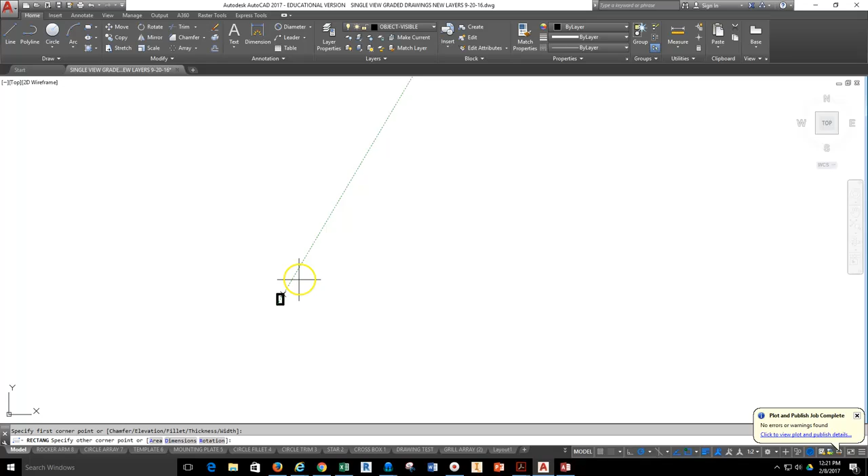In order to show how the rectangular array will function for us in AutoCAD, I'm going to grab a rectangle and draw one with dimensions of 1 inch by 1 inch, so this is a 1 inch by 1 inch square.

I want to make a series of these that line up in columns and rows, and I want to make 100 of these across my screen. To start the array, I'll pull down the array tool and select rectangular array.

My command line now says select objects. So this rectangle is the object I'm going to work with, so I select it, and then I go ahead and hit enter.

Now the array tool gives me several options, and the ribbon bar changes into the array dialog box where I can see columns, the distance between, total numbers, rows, distance between, total distance, and I can also look at the array itself, which has several grip points and places to see the distance between.

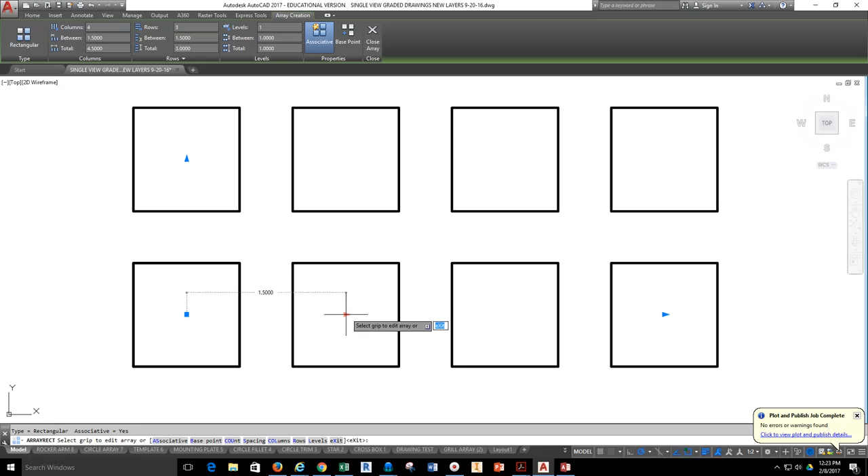If I sit over top of this particular arrow for a second, I get the distance between center point to center point. If I come to the arrow at the far end of the array, this is telling me how many columns I have.

If I select this and pull, I can now add columns, and if I sit over the arrow again it tells me how many columns I have. I can do this with rows and columns, and also adjust the distance between the same way. That same information can be adjusted on the ribbon bar.

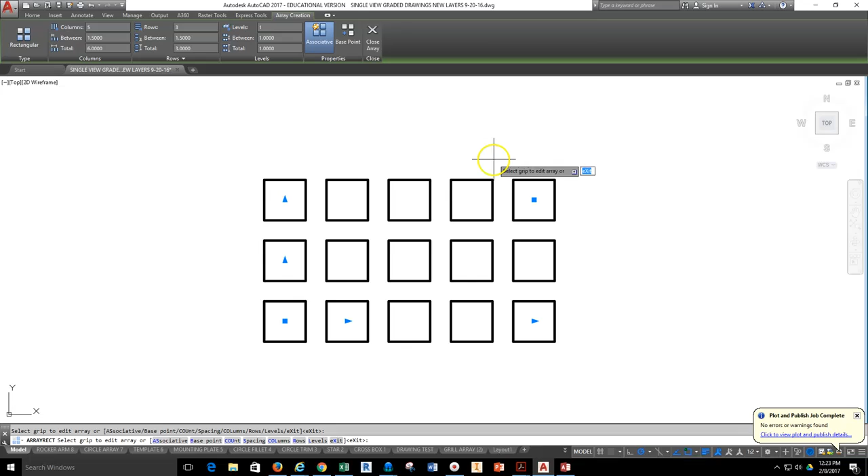If I wanted to take those 7 columns and make them 5, I hit enter, and now it takes me down to 5 columns. Same way with rows - if I want 5 rows, hit enter, and it now creates 5 rows.

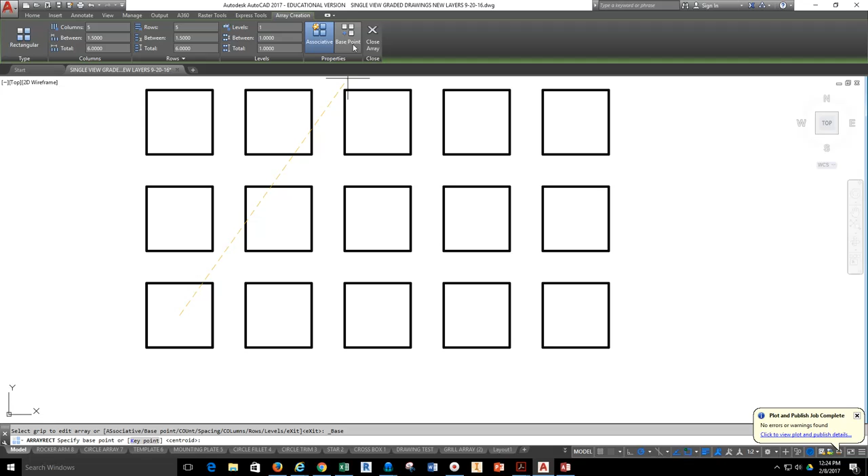This particular center point, or base point, can also be moved to another point on this host object by selecting the base point tab on the ribbon bar and relocating it to where you'd like to put the new base point.

Whenever I start working with arrays, I generally take and put it down at the bottom left-hand corner because it's just easier for me to work with an array in that particular orientation. Okay, rectangular array is fairly straightforward.

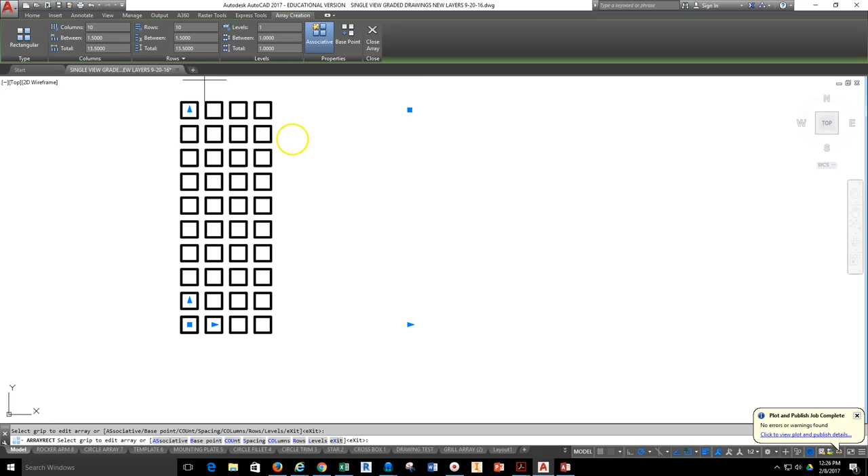The only other thing I want to cover with the rectangular array is if I make a particular array - let's make a big one. If I go ahead and do 10 by 10, so I have 100 objects here, and make my distance between 2.0 both ways, so they're spaced evenly.

Now I'm going to say, okay, this top set of 9 objects I don't want anymore. I want everything else here, but I don't want this top set of 9.

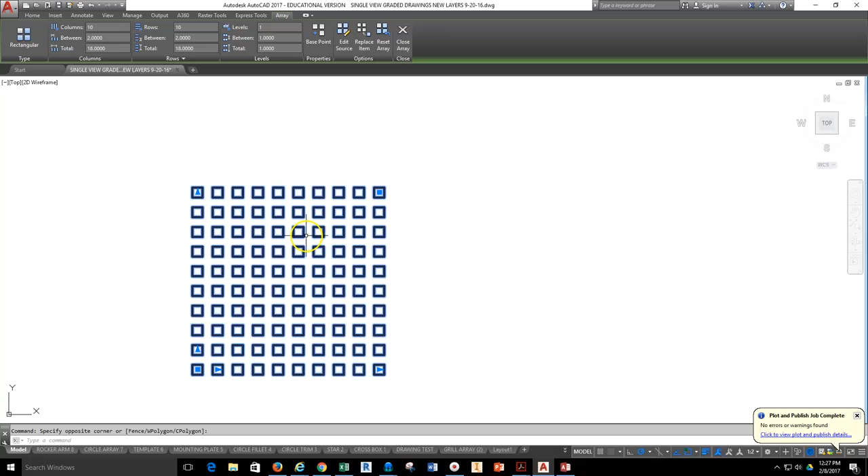If I wanted to close this array and then start selecting these to delete them, and do a crossing window over the objects I want to get rid of, what happens is it selects the entire array. Well, I can't do anything to the entire array to get rid of these 9.

I have to then do something else. In order to get rid of just 9 pieces, or a particular portion of an array, what you have to do is explode the array.

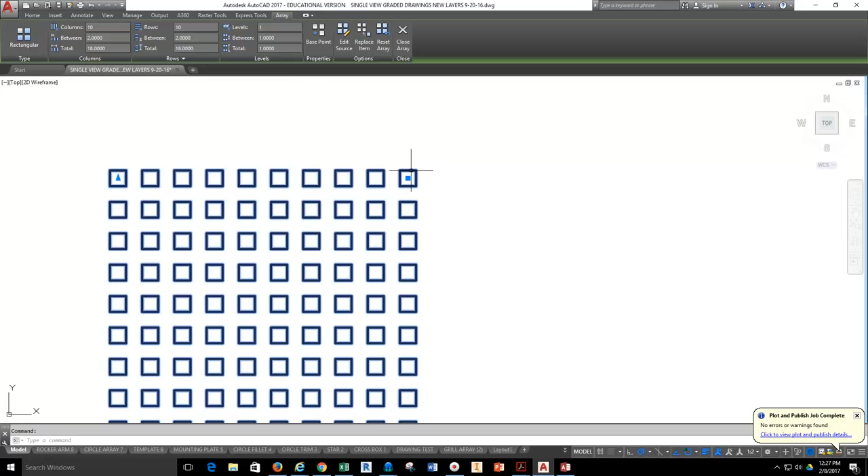So what I'm going to do is select the array once, and then go back to my Home tab and select this tool. This is called the Explode tool.

In previous versions of AutoCAD, the Explode tool was actually a small stick of dynamite. That was the actual symbol. The symbol now is developed into what looks like a glass box with all of its sides coming apart. But this is the Explode tool.

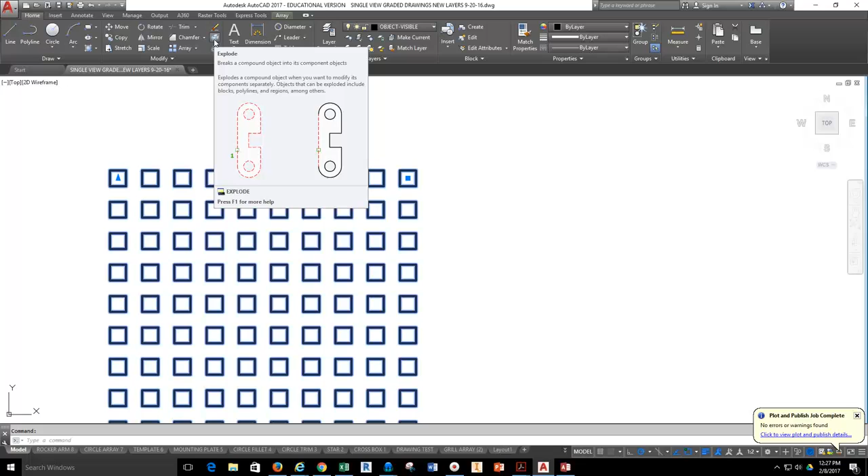So once I've selected the array, and then I select the Explode tool, now I can alter any piece or portion of this array. So if I wanted to highlight these 9 and delete them, it will let me. Okay? However, this is now no longer an arrayed object. This is just a series of objects. So I can't make changes to this globally. I can just make changes to parts and pieces of the object.

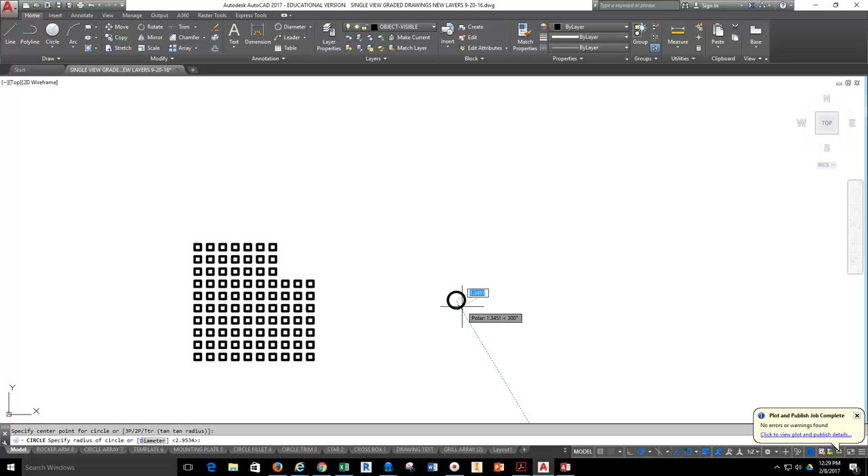Okay? All right. So now, that's the rectangular array. Next, we're going to go over the polar array. And to start this concept, I'm just going to go ahead and draw a 2-inch circle. This is actually a 4-inch diameter circle, 2-inch radius circle. I'm going to go ahead and draw another circle that is going to be directly above the first one, and this will only be 1/2 inch in radius. And then I'm going to start the idea of creating a polar array around the center point.

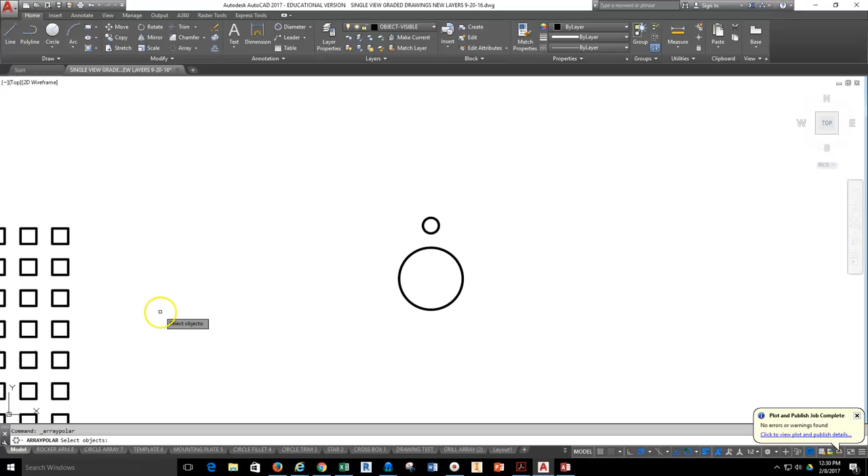So what I'm going to do now is pull down the array tool, slide over here, and select the polar array tab. Again, I start looking at my command line. My command line says select objects. So the first thing I'm going to do is select this little circle, because I want to end up making copies of this little circle around the big circle. So once I select that, that's the only object I want to array. I hit enter, and then it says specify center point of array.

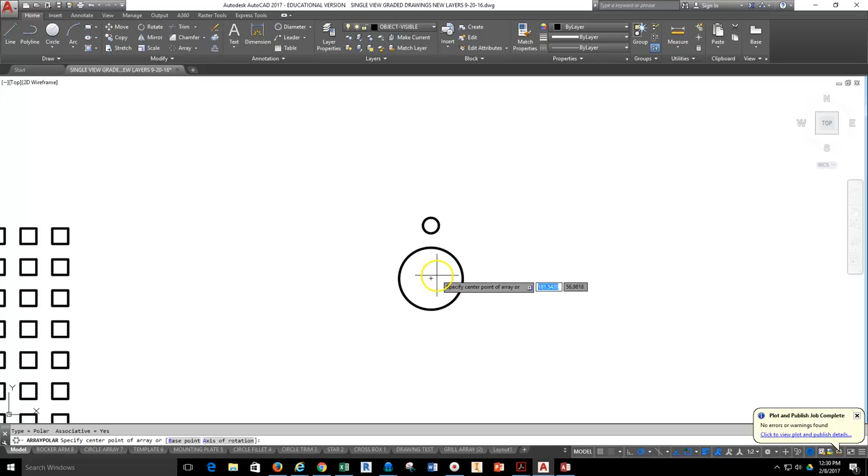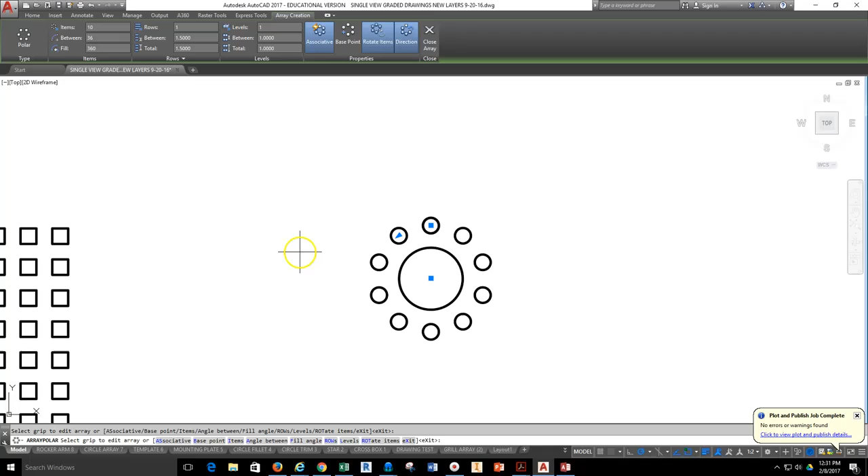So I'm going to come down here, hit the center point, and now it turns on the array tool and it starts to place a series of objects around that circle. Now, what I can do again is go up to the ribbon bar and start adjusting. If these 6 items aren't what I want, and I say I want to do 10 items, and then hit enter, it will then space 10 items out equally around my circle.

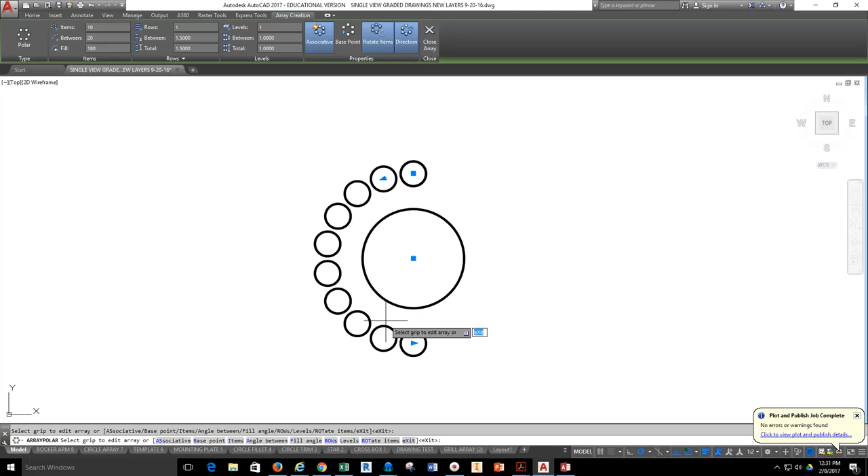I can then also tell it that the total angle that I want to fill around my circle is, let's just say 180. That's going to not be 360. It'll then space these 10 items equally at 180 degrees, not 360 around. So you can really adjust and play with this depending upon what is necessary for your drawing and your particular setting.

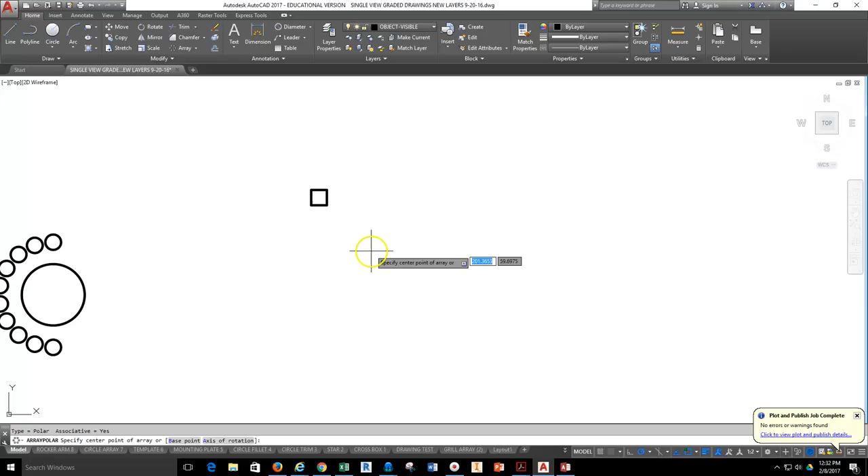Now, it doesn't mean that you have to get stuck with one object. The array tool, I'll go ahead and close this out. The array tool can function with anything. It doesn't have to be circles. I'll go ahead and draw another square here, and I'm not even going to create a circle for a center point, just to illustrate the idea that I can select this particular rectangle, hit enter, and the next place I click will become the center of the array. So if I just click here, no real rhyme or reason, it will array these objects around the center point.

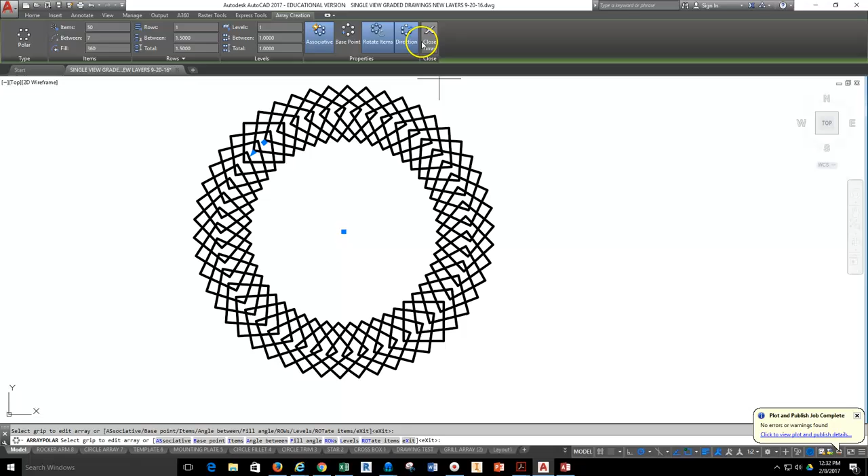I can then also begin to add items. If I make 50 of them, it's going to create that array. So you can see how the array tool really is just driven off of any of the information given here. I can close the array, and then I can go ahead and explode this particular array. Now we just have squares in a pretty interesting pattern. All right. So it's not just one object either.

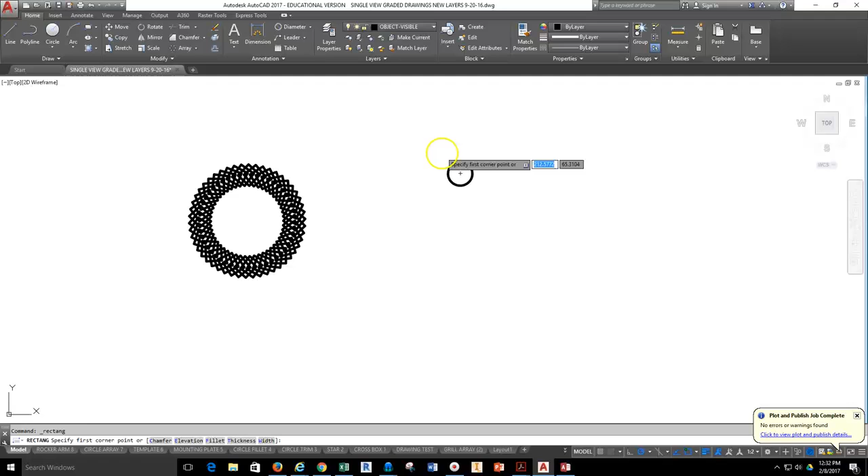If we were to go ahead and select, let's say we'll do a circle and a rectangle around that, we can then grab the array tool, highlight, hit enter, grab a point, and it doesn't matter. It can do multiple objects in the array. So if you have a complicated part where you have to make several objects in an array, you can do that all together. So hopefully this will take you through the array tool and get you through whatever drawing you need to do.